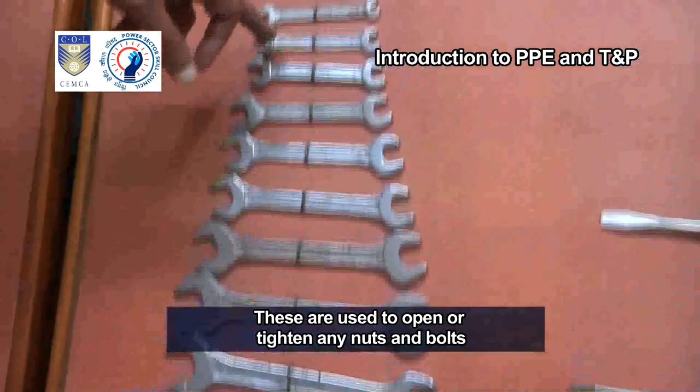These are open-ended spanners. These are used to open or tighten any nuts and bolts. These are screwdrivers, which are used to remove or fix any screws. The next tool is the hacksaw, which is very important for a lineman.

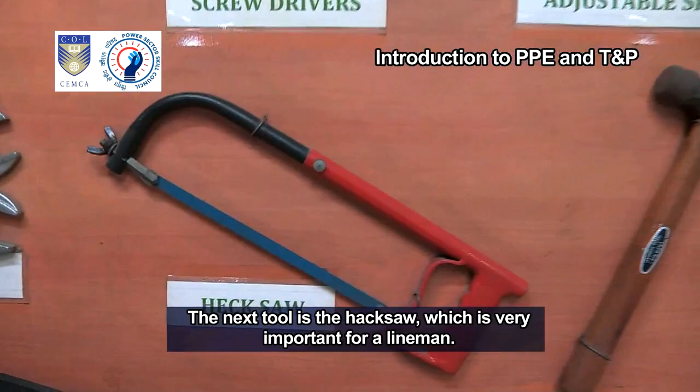These are adjustable spanners. They are used when the open-ended spanners cannot be used for opening nuts and bolts. Coming to hammer, it is important to have a hammer of a correct size. Hammers are used for hammering items wherever required. It is important that the wooden handle of the hammer is correctly fixed to the hammer head. It should not be loose, else linemen can get injured.

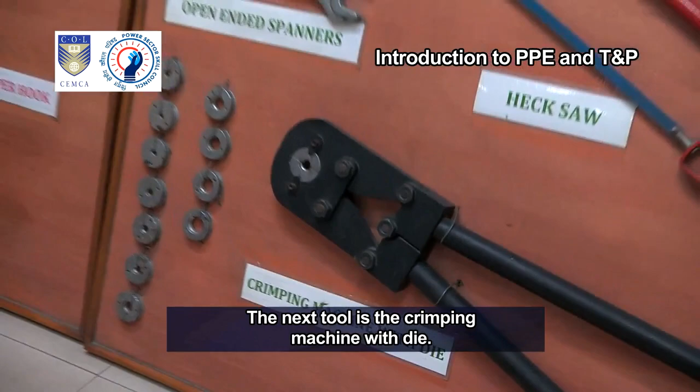The next tool is the crimping machine with die. Different types of sockets are used in electrical work. These are the dies used for such sockets. Usage of such sockets is very important. Always remember that the sockets should never be fixed using hammer. They should be punched using the crimping machine only.

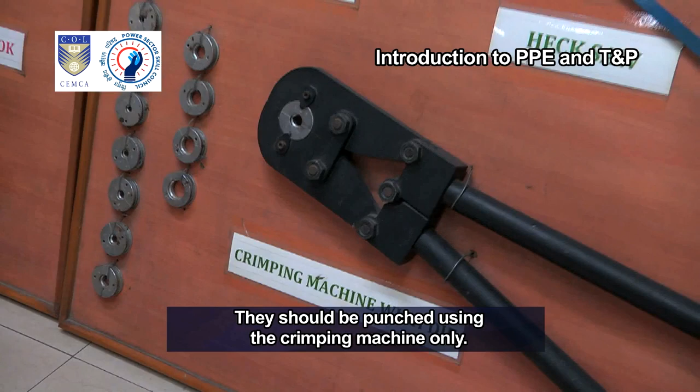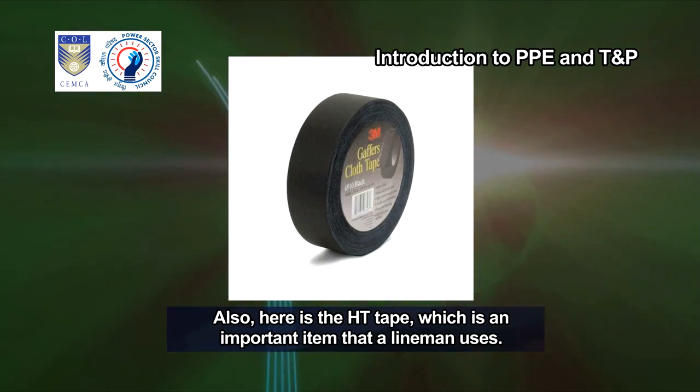Let us now look at the other tools. Tape in various colors like red, yellow, blue and black. The colored tape is used based on the phase the lineman is working. Also, here is the HT tape, which is an important item that a lineman uses. CRC is used wherever the equipment is carbonized to remove the carbon deposits.

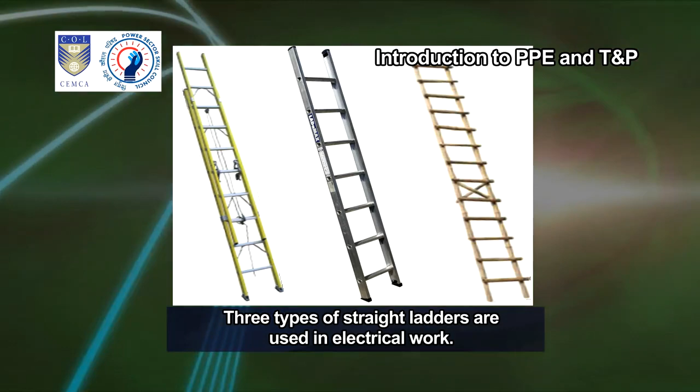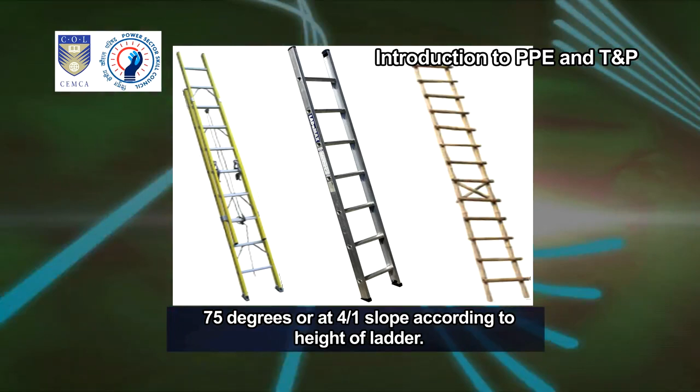Ladder. 3 types of straight ladders are used in electrical work: wooden ladder, aluminum ladder, fiberglass ladder. The most stable angle for a portable ladder is approximately 75 degrees or at 4/1 slope according to height of ladder. Thus, ladder is kept at a maximum angle of 75 degrees to the wall or pole. A technical helper must firmly hold the ladder at the bottom in case of pole, when the upper portion of ladder is not tied to the pole.

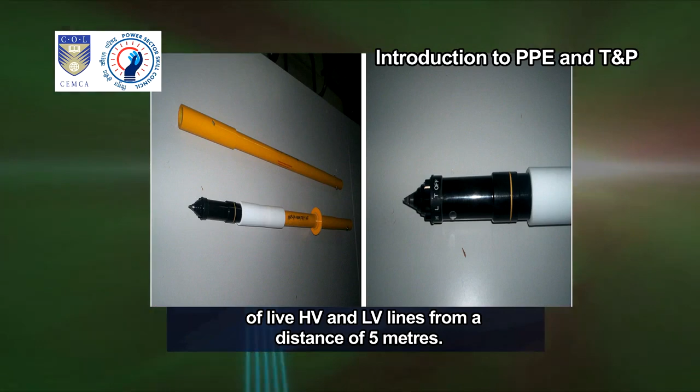HV and LV tester. It is a protective instrument which gives alarm indication of live HV and LV lines from a distance of 5 meters. HV and LV tester is fitted to a PVC conduit pipe 50 mm of 2 meters length and extension rod of 3 meters.

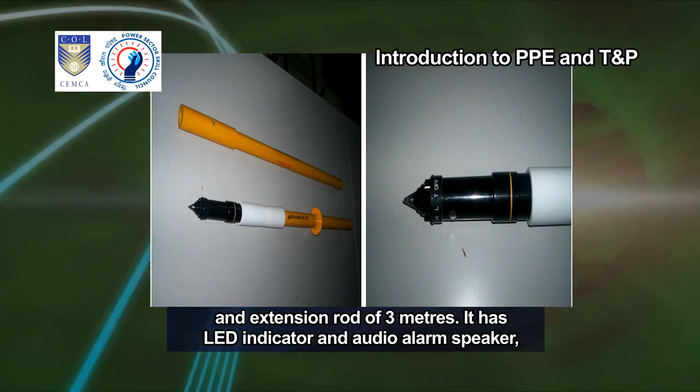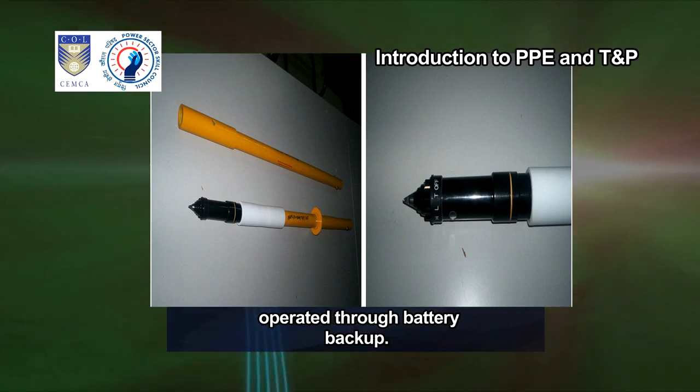It has an LED indicator and audio alarm speaker which produces a beep sound when its point is brought near the live line. It has 3 modes: on, off and test, operated through battery backup. If there is no beep sound and no indicator lamp light, it shows that the power supply is dead at that point.

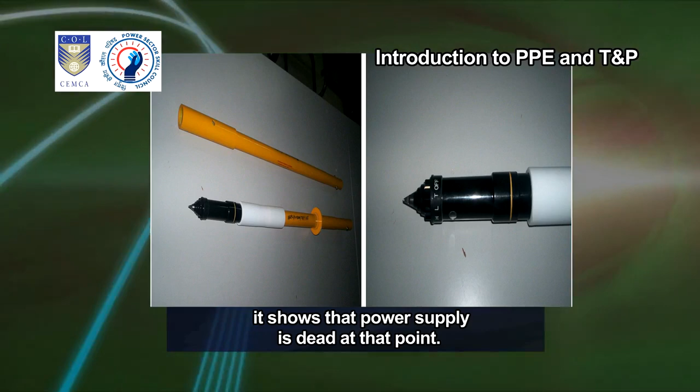Discharge rod: it is an insulated rod with an extension rod having a resistance or corona capsule at the end, which is connected with an earthing lead.

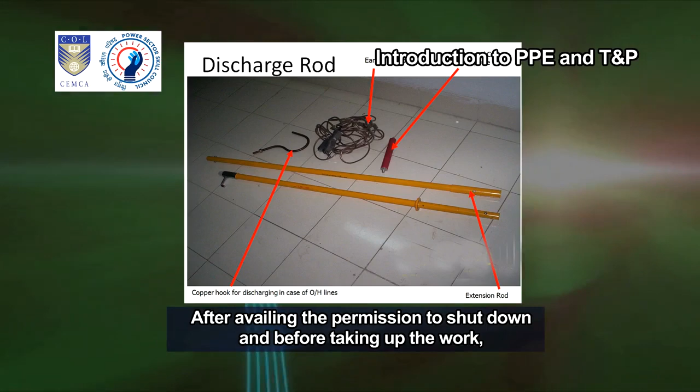After availing the permission to shut down and before taking up the work, all the live conductors are discharged and earthed. Overhead lines are discharged with the help of the copper hook.

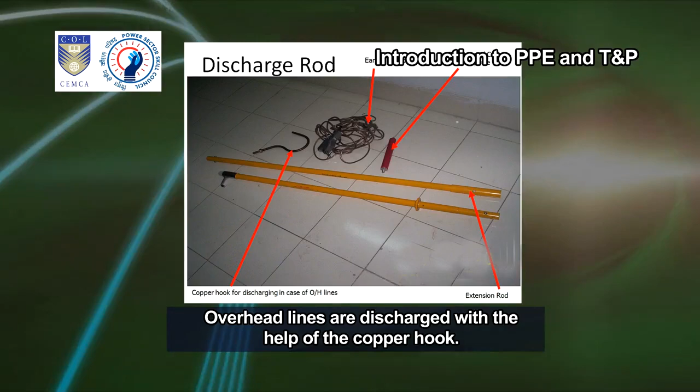Safety cones are usually cone-shaped markers that are placed on roads or footpaths to redirect traffic safely.

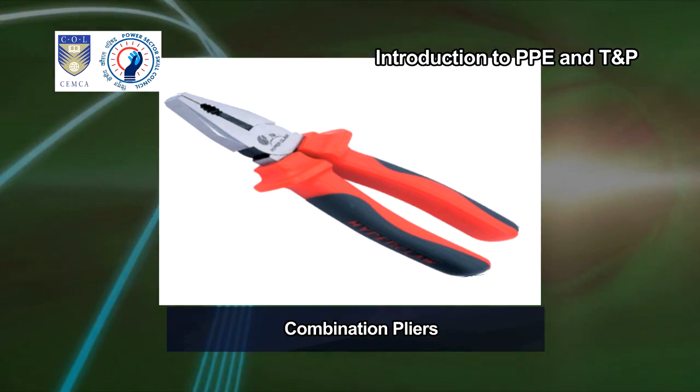Combination pliers are used for cutting, removing insulation, joining and twisting electric wires and cables on power lines. They can be used even when current is passing through them.

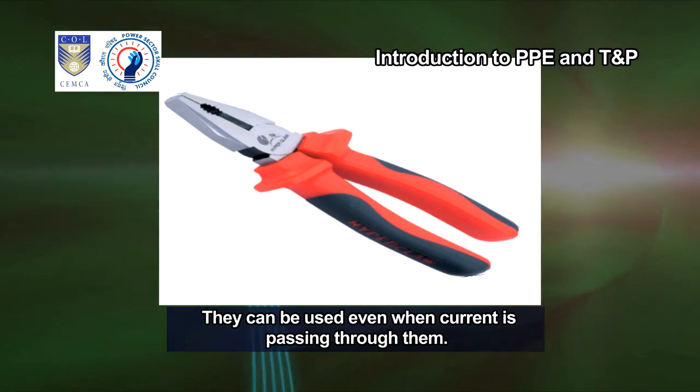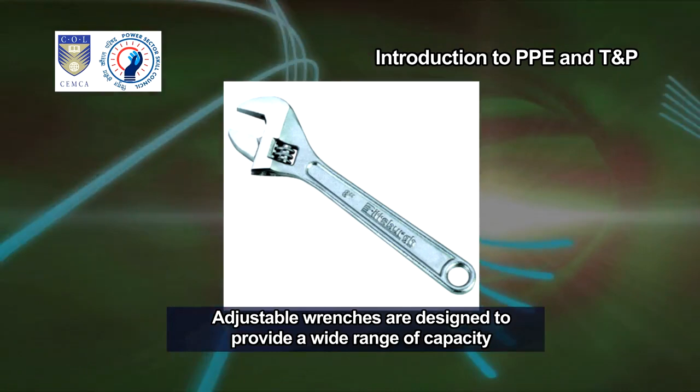Adjustable wrench is used to open and close nuts and bolts in case a spanner of the right size is not available. Common sizes vary from 8 inches to 12 inches. Adjustable wrenches are designed to provide a wide range of capacity in a single tool and are very convenient.

Pipe wrench: it is used to open or close conduit, GI pipes and valves. Common size is 10 inch. The design of the adjustable jaw allows it to lock in the frame such that any forward pressure on the handle tends to pull the jaws tighter together. They are usually made of cast steel.

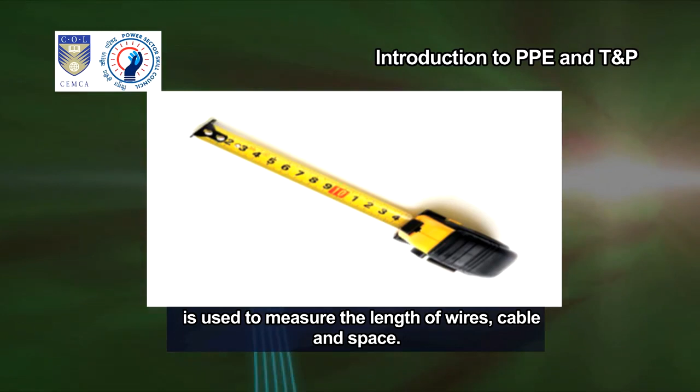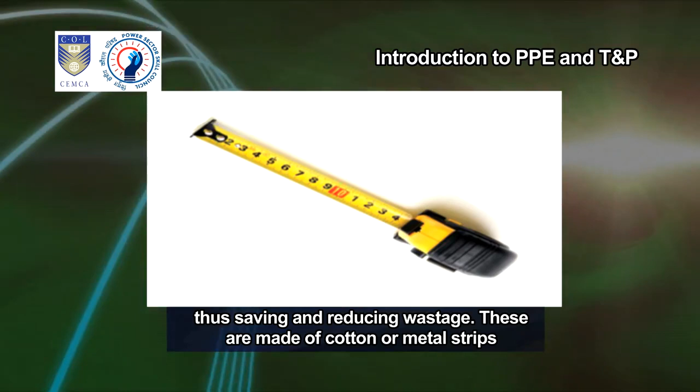Measuring tape is used to measure the length of wires, cables and space. Use of measuring tape helps in efficient use of cable, thus saving and reducing wastage. These are made of cotton or metal strips with sizes of 10 feet to 100 feet.

Ratchet with drill bit, hand drill: it is used to make holes in wooden cross arms and wooden cleats for tight-fitting HT and LT cables coming out from DP structures and LT transformer bushings.

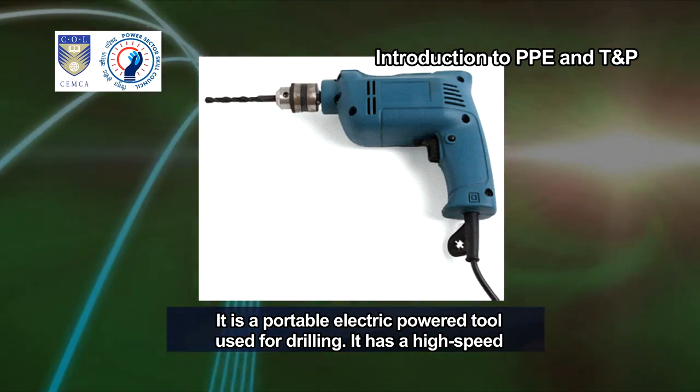Electric drill machine is a portable electric powered tool used for drilling. It has a high-speed motor to revolve the chuck. It is used to make holes smoothly and easily.

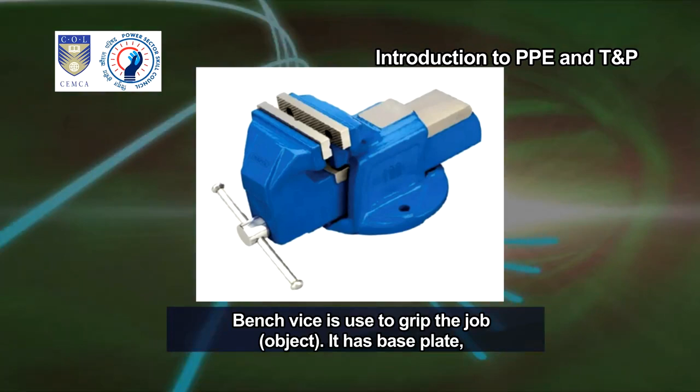Bench vise is used to grip the job object. It has a base plate, a fixed jaw and a moving jaw.

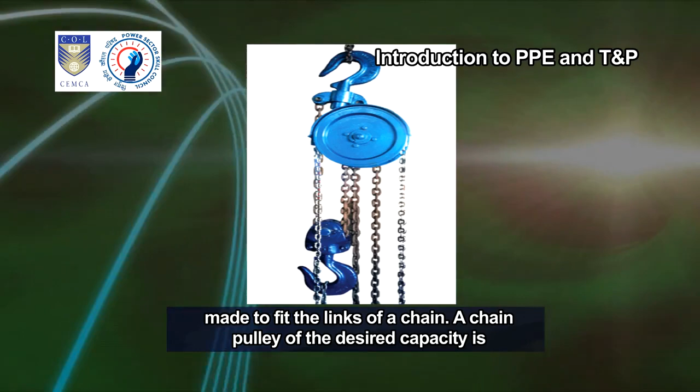Chain pulley is a pulley with depressions in the periphery of its wheel or projections from it, made to fit the links of a chain. A chain pulley of the desired capacity is hooked at the center to lift heavy loads for loading and unloading at the site.

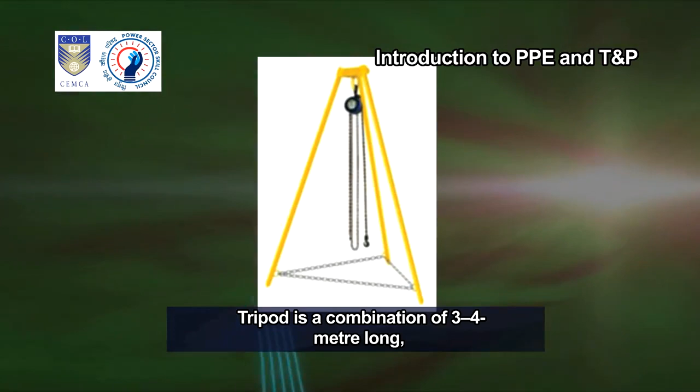Tripod is a combination of 3 to 4 meter long, 40 mm GI pipes hinged at the upper end to form a tripod.

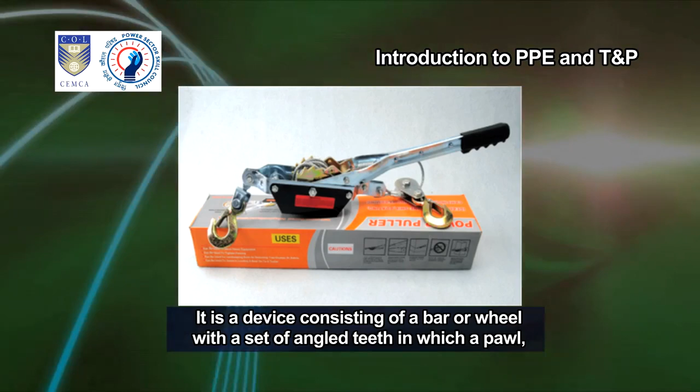Ratchet device is a device consisting of a bar or wheel with a set of angled teeth in which a pawl, cog or tooth engages, allowing motion in one direction only. Ratchets are widely used in machinery and tools as well as maintenance works.

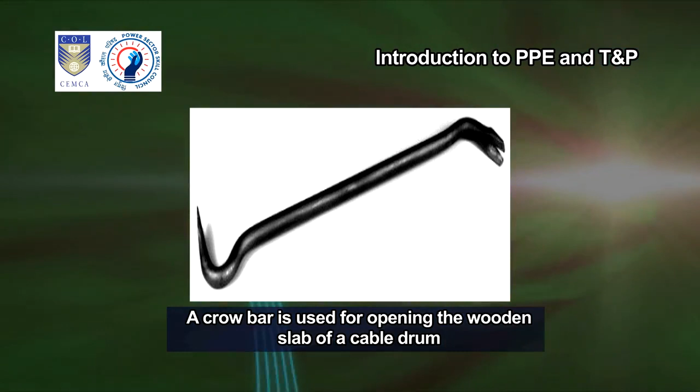Crowbar is used for opening the wooden slab of a cable drum as well as hooking the drum on the wheel while laying cables and conductors.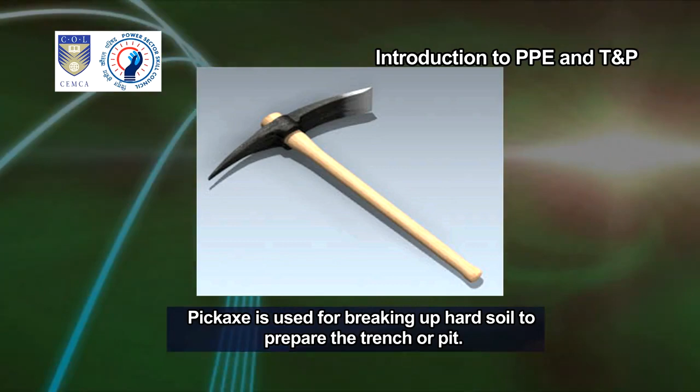Pickaxe is used for breaking up hard soil to prepare the trench or pit.

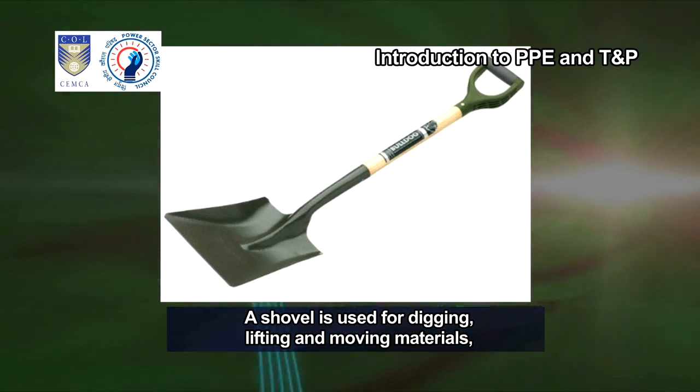Hoe is used for digging the soil for various activities, such as preparing a cable trench or a pit for pole erection. Shovel is used for digging, lifting and moving materials such as soil, gravel, snow and sand.

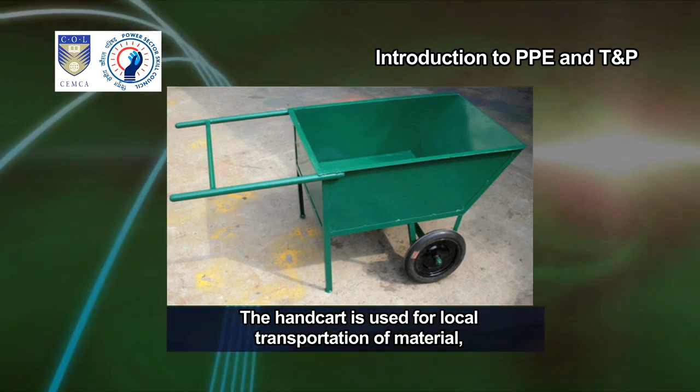Handcart is used for local transportation of material, tools and tackles from the site store to the workplace.

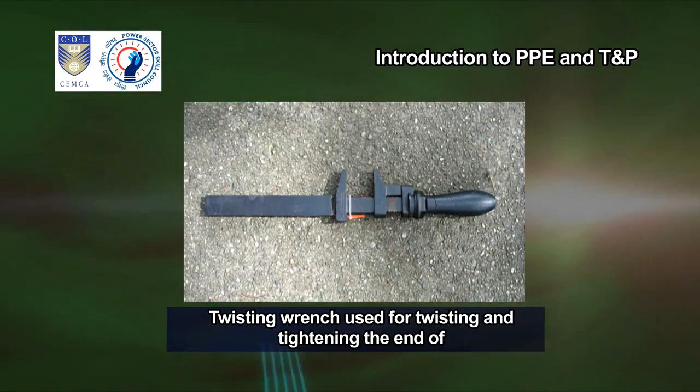Twisting wrench is used for twisting and tightening the end of overhead conductors, ACSR, and overshackle insulators.

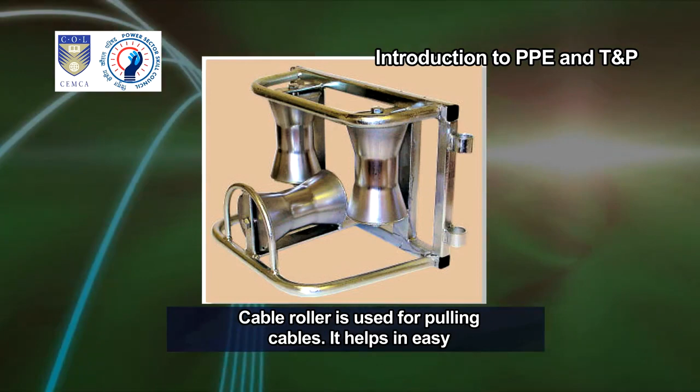Cable roller is used for pulling cables. It helps in easy movement and flow of the cable pulled during the laying of cables. It is of two types.

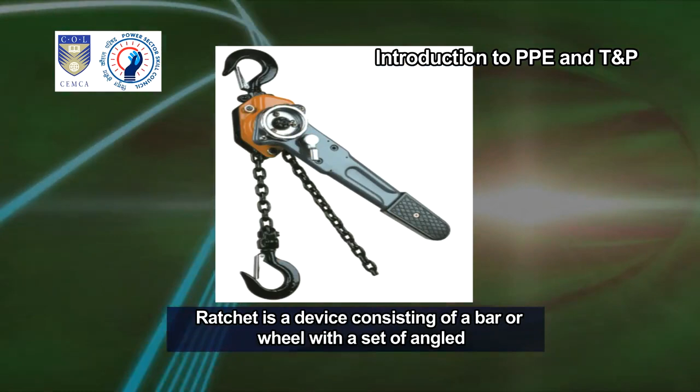Ratchet is a device consisting of a bar or wheel with a set of angled teeth in which a pawl, cog or tooth is engaged, allowing motion in one direction only.

Phase tester is used to identify or test the phase, live, hot or positive wire or conductor.

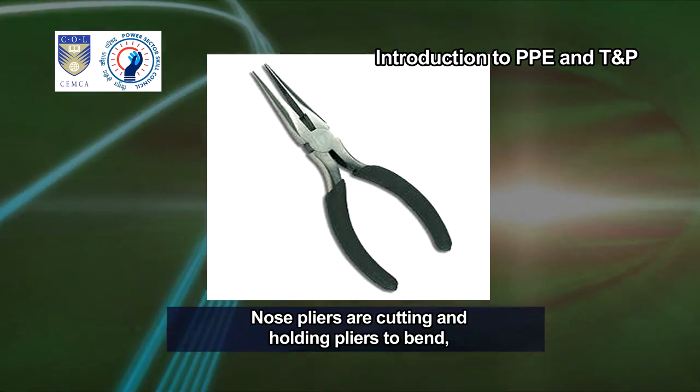Nose pliers are cutting and holding pliers used to bend, reposition and snip wires.

An electrician's knife comprises an integral thick insulation and a substantially flat tube, which serves as a sheath for receiving the cutting blade.

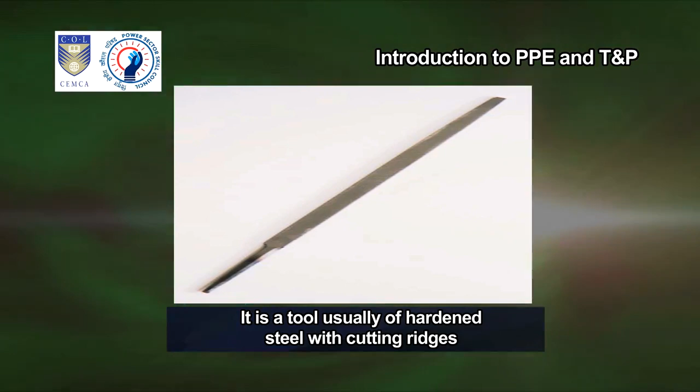Chisel is a metal tool with a flat, sharp end that is used to cut and shape solid material. File is a tool usually of hardened steel with cutting ridges for forming or smoothing surfaces, especially of metal.

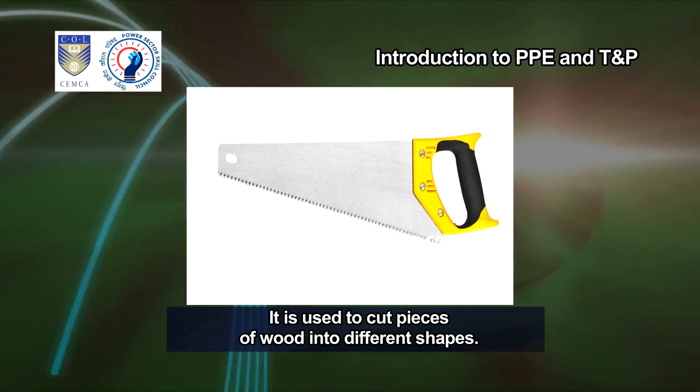Wood saw is used to cut pieces of wood into different shapes. This is usually done to join pieces of wood together and carve a wooden object.

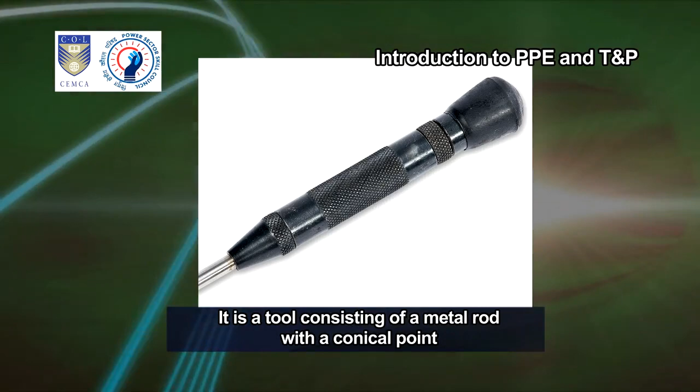Center punch is a tool consisting of a metal rod with a conical point for making an indentation, to allow a drill to make a hole at the same spot without slipping.

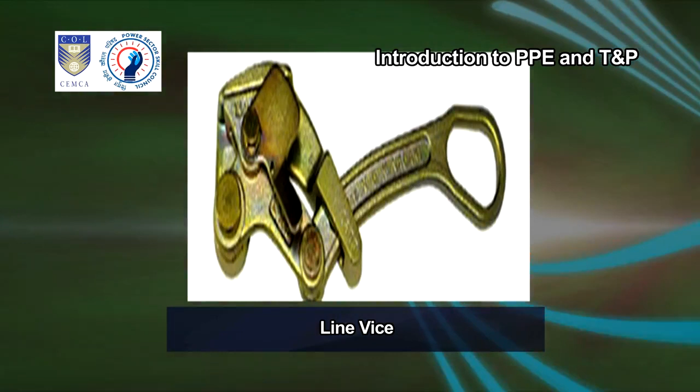Line Vice is a portable vice used in overhead systems to catch, grip and sag the conductors.

Draw tongs or dogs is used to draw overhead conductor during line erection and fitting the pin insulator over newly erected poles, to maintain the sag between lines.

In this video presentation, you have seen personal protective equipment, PPE, and tools and plants, T&P.